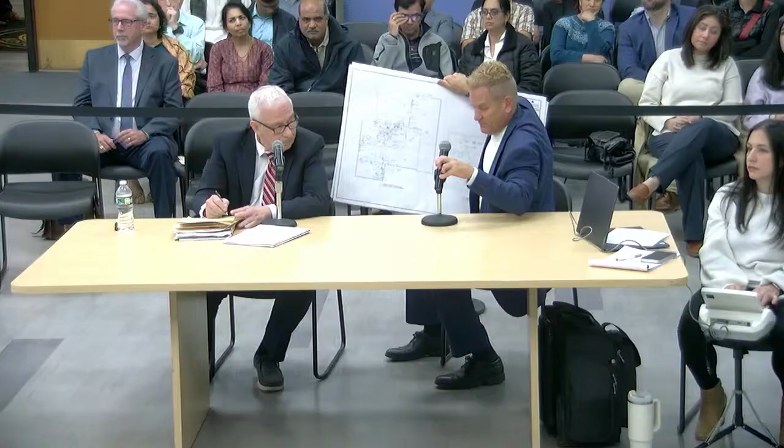So essentially, the current configuration of the house had a void in the back left corner. Mr. Kazmarski, if you'd like to take the microphone and come up, that's perfect, you don't have to stay in the chair. You can use the easel, just got to give it back though. Come right here, bring it forward so the board can actually see it.

So the existing configuration of the house is this area, on sheet D1. Currently there's a deck which occupies most of this space. My design for the owners is a residential addition for additional space in the house, which I'll go over, on sheet A1. We filled in essentially the void in the back left corner of the house. The design needed to be on the first floor for health reasons of the owners. We maintained the existing front yard setback, existing rear yard setback, existing side yard setbacks, did not go over the height allowances, and filled in this area. It did trigger a building coverage variance. Floor area ratio is okay.

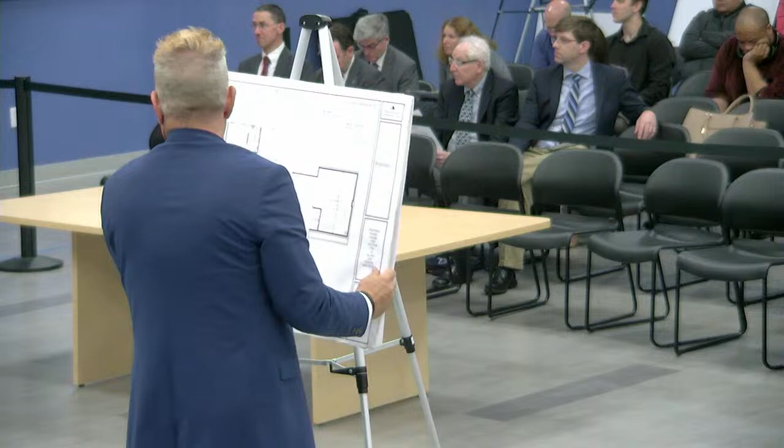Chair, just as the board's considering this, I haven't been involved in the conversation, but there's two things the board may want to consider: Edison's definition of floor area ratio, which is specific to Edison, and its ordinance is pretty tight. It generally excludes unfinished basements and attics from the floor area ratio calculation. But the exclusion doesn't really mention habitable spaces or make that classification. Habitable spaces, as defined by the Uniform Construction Code, are areas intended for daily living activities: bedrooms, living rooms, kitchens, and dining rooms. Other things like bathrooms, toilets, closets, halls, storage are not included as habitable under the UCC.

So, Mr. Architect, you're going to describe to the board the difference between UCC and what the ordinance intentions were versus the language of the ordinance. Mr. Scheer is going to determine on the fly whether he needs relief from the floor area ratio ordinance, because right now I'm hearing that you don't need relief from that. Yeah, we do not need relief from that. Okay, so just make the distinction.

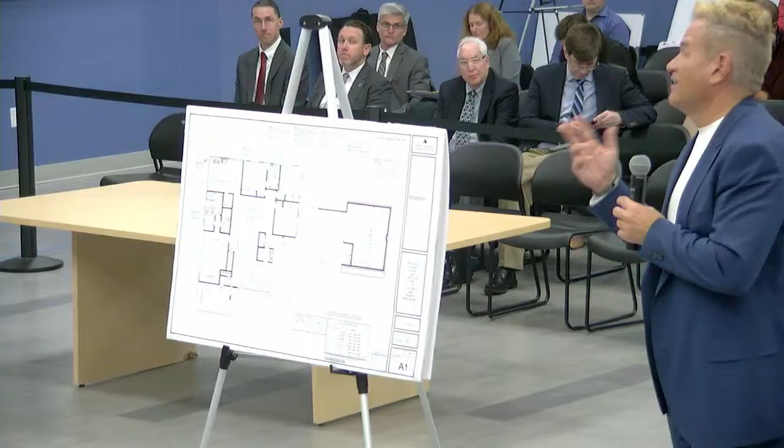And you did prepare the floor area ratio calculation certification sheet and submitted it to the good-looking people down at the end of the dais, right? Yes. Okay, and everyone found everything to be in order. Yeah, and we're significantly under the allowable floor area ratio, and that's because there's no second floor. So are you counting, whatever the application is now, the basement square feet in the floor area ratio or not?

I would have to look at the worksheet. Do we? Can you? No. Yeah, I think we're... It's not included. Habitable attics and basements are not included in that. Correct, up to two-thirds of that. No, just don't go there. Just habitable attics, yeah.

Sure. So we have 2,800 square feet. See, we are. Right, so where 44% is allowable, we're at 27%.

No, I get it, but does that 27% include the basement square feet now or not? That includes... so I guess in Edison garages count? Garages count, habitable attics count, but not uninhabitable attics and not basements. And what about basements with finished rooms? Right, so I didn't include that in the calculation. You're making it a habitable basement. Even if it's a finished basement, it wouldn't count. Correct.

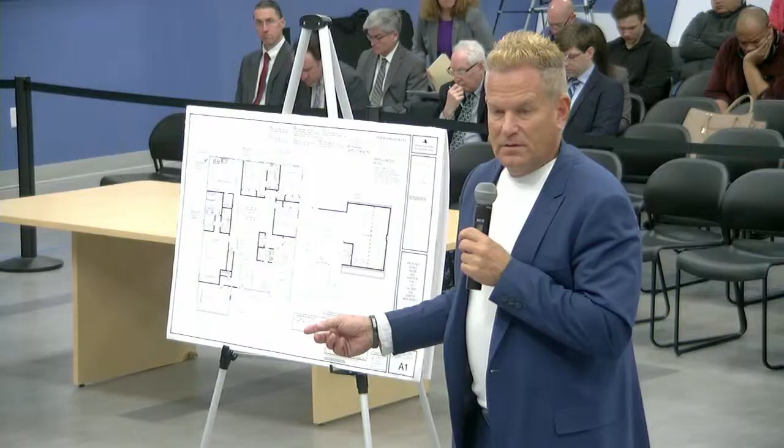So currently they have an area that's finished, right here. If they add the basement bedroom and that kind of stuff, does it become habitable? Yes, it does become habitable, but - Mr. Dave, if you could just be in the microphone please, for the court reporter. Give me the FAR sheet. So currently this area here is a finished area in the basement, which was not included in my floor area ratio calculation. There is a current bathroom there, which is existing.

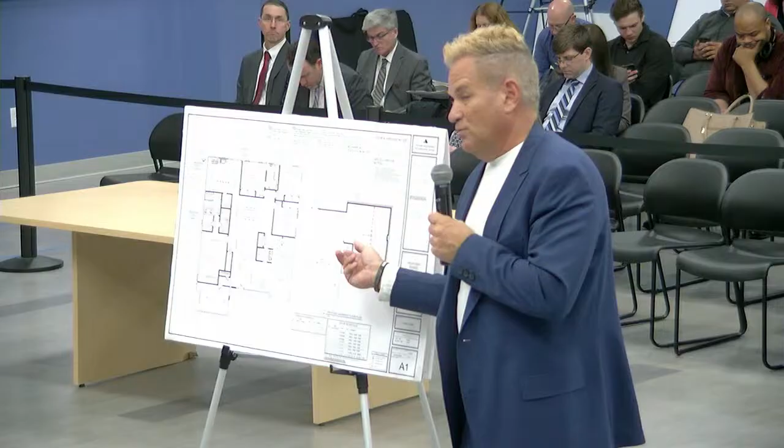The bathroom's been modified to improve the area of the bathroom. It's actually slightly bigger than the square footage of the bathroom that exists. This is the area here that has been added as additional basement space. This also would not be included in the floor area ratio, and there would be no bedrooms in the lower level, so it would not trigger.

Basements are not included, Ron. Yeah, it's just not, so - finished or unfinished? That 27% is accurate on the plan. Habitable attics are included, uninhabitable are not. Thanks, Jim.

Right, so how much work is done now for the basement? Did you do the foundation or just the excavation? Excavation only. The full basement is excavated now, but no foundation? I don't know if it's totally excavated. He got stopped before it was completed.

It's not completed. And I did ask, and I spoke to John Soltis - the contractor did take my plans, submit them, obviously anticipating a permit, and started the work. So I guess it's worse to start the work with no permit and no submission, but he submitted it and started the work before the release.

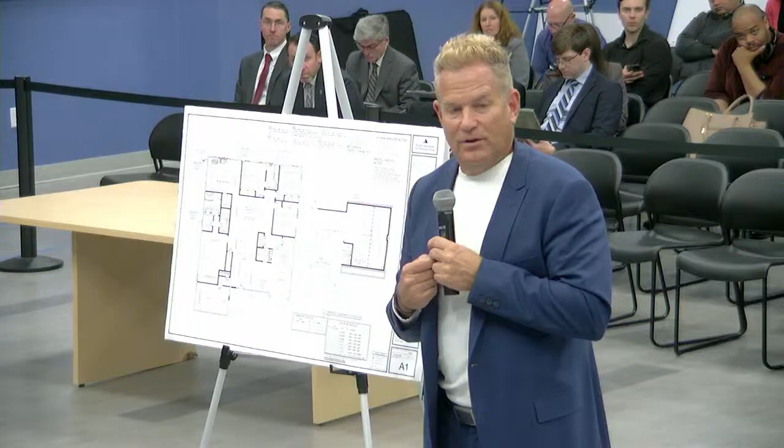But there's a letter of denial on those plans - is that correct? Is that the same plans we're talking about? So he got denied, but then he still submitted it? Well, no, he submitted, started work, then got denied. I think the timeline got messed up. They received a clear denial to start or do the work, and he started after that. Oh, okay, correct, yeah. I didn't know that.

We've had no contact with the contractor, no contact with the homeowner, none. No one came to our office to explain, and I put my phone number down - contact us please, so we can rectify the situation. Never received anything. But I take Mr. Shire's word that they pleaded not guilty in court, but I received nothing. So that's what it is. We have two things happening in tandem - the solution for that, and then the request. I got you.

Okay, so since Mr. Kosmarski has a microphone, does anybody have any questions for Mr. Kosmarski from the board? Seeing none, okay, so then you could hand the microphone back to Mr. DuPont, and we'll check with him.

Mr. DuPont, do you have anything to add? No, planning testimony is complete. Okay, does anybody from the board have any additional questions for Mr. DuPont? Seeing none, thank you, Mr. DuPont. Ms. Shire, do you have anything to add? Not unless there are some questions from the public.

Okay, so we'll now go out to the public. Anyone within 200 feet of the subject site want to be heard? If you're within 200 feet of the subject site, you received a notice via certified mail, sir. If you could please approach.

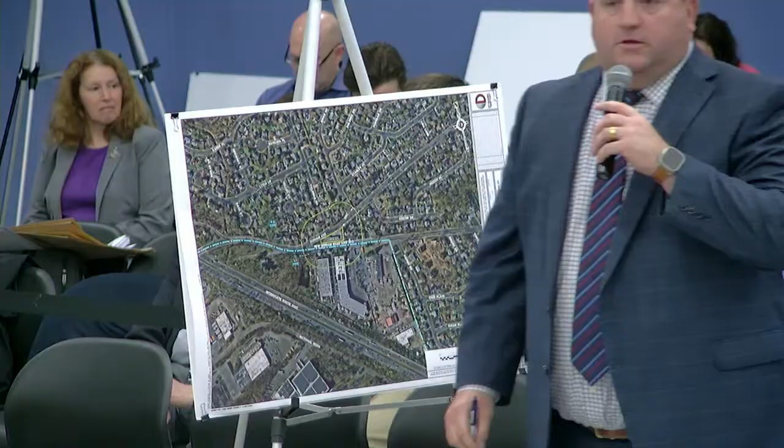Just the aerial. So we'll start off with marking the aerial map exhibit, dated April 28, 2026. Has that been previously submitted? No. Okay, so mark it A1. A1, thank you, and this is prepared by Dynamic Engineering. What's the date on that? April 28th, 2026. Okay, so today. Yes. And you prepared that document? Yes.

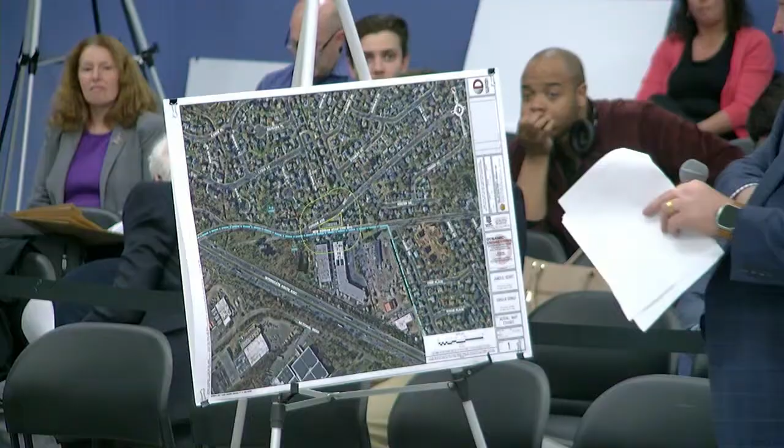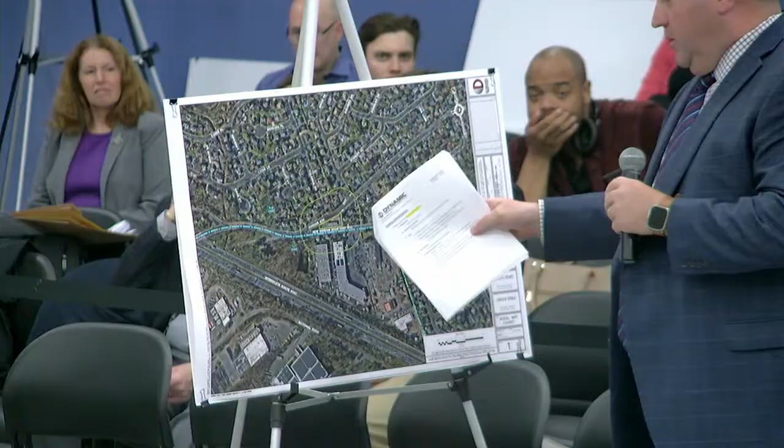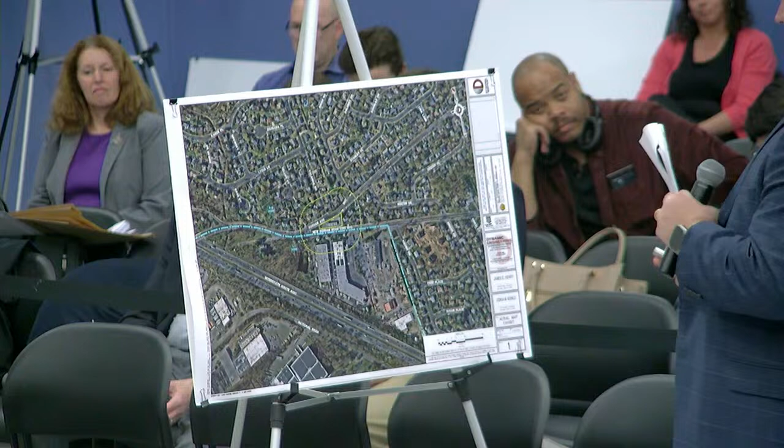This document indicates an aerial image of the proposed property with the PIQ indicated in yellow in the center, and then a 200 foot dashed line around the property indicating the property is within 200 feet. There's also a blue line which indicates the separation between the LI zone and the RB zone, with the LI zone being south of New Durham Road and north of New Durham Road being the RB zone.

The property is known as Block 5702, Lot 12, located at 764 New Durham Road, which is County Route 501 and traverses east-west. Durham Avenue comes in at almost a 45-degree angle, headed northeast to southwest.

The lot itself is kind of a pie shape. It's a very uniquely shaped lot. It's conforming as far as size, but very unique, being that it's got 2 frontages, 2 side yards, and frontage on both Durham and New Durham Road. Its principal frontage is New Durham Road.

From existing zoning, it's in the RB zone, as mentioned earlier, which is a residential district. Adjacent to the property, to the north and east are residential uses. To the south are industrial office uses. And to the west, at the intersection of New Durham and Durham Road, are residential uses.

As far as existing conditions, we reviewed historical aerial documentation. The gas station was constructed between 1957 and 1963 based on historical aerials, actually before a lot of the residential uses were constructed. The property size is 0.67 acres. It's an existing gas station use with a small building along the easterly property line.

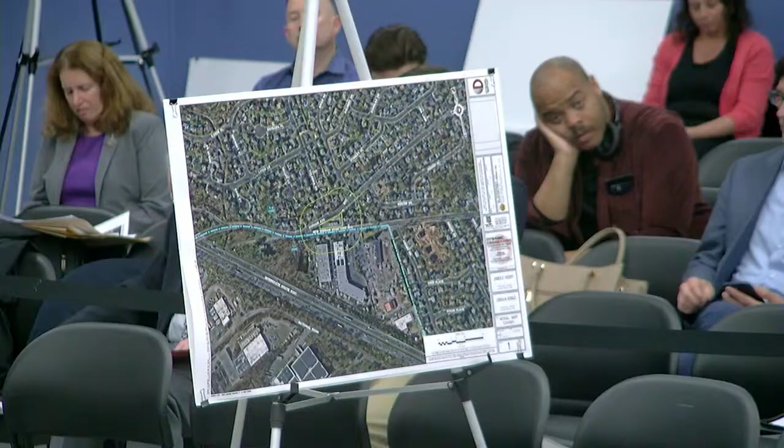There is an existing underground tank along the northerly property line along Durham Avenue. That's an existing condition. There's no restrictions on delivery time, as the site was originally approved prior to municipal land use law.

So going into proposed conditions, I'll mark A2. And Jim, just also, there's no stormwater management, and there's no comprehensive landscaping on the property.

It's been around since the 1960s, pretty much, without substantial modifications, though there have been some upgrade changes. There's definitely been a canopy added since the 60s—back then there was no canopy, just a pump. So there have been changes throughout, but as far as we're aware, there were no approvals from municipal land use.

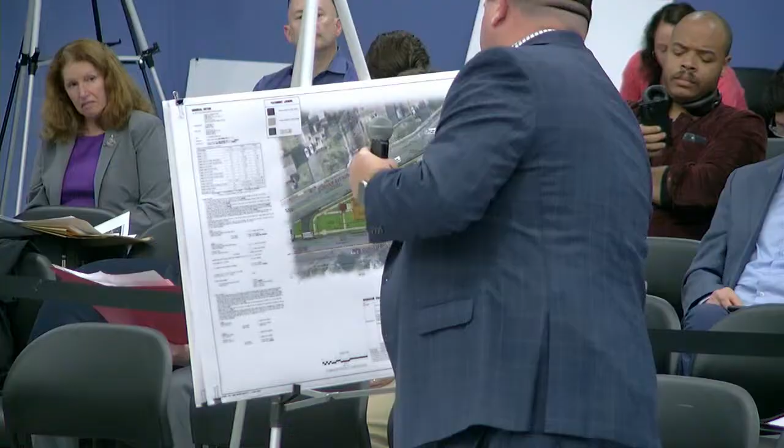So we're up to A2, which is a rendering of the site plan that was submitted with a few minor changes based on professionals' comments. That will be the on-site improvement exhibit rendering, dated April 28, 2026, prepared by Dynamic Engineering, myself.

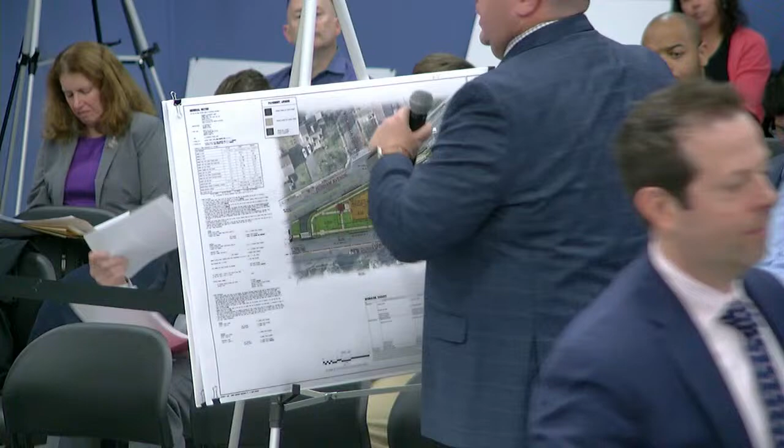This is just a color rendering with the landscaping overlaid over the property and the site plan. Under existing conditions, the canopy was situated east to west. The big thing, based on feedback we received historically, was that there was a previous application submitted that was not approved by this board, so we wanted to pull everything away from the residential uses.

When we met with the town's professionals, they indicated there was an issue at Durham Road and New Durham Road, and we'll get into the intersection improvements. But we wanted to situate this so all the activity was pulled towards the tip of the triangle, away from the adjacent residential use to the east.

So what we're looking to do is propose a 2,820 square foot convenience store. The hours of operation would be 5 a.m. to 10 p.m., so it wouldn't be 24 hours. There would be one gasoline fueling canopy, square in nature, in the center of the site.

With a fueling kiosk, there will be 2 state-of-the-art double wall fiberglass underground tanks installed. The tanks that are out there today have been there since the 1980s, based on the operations person I spoke to, so this would be a major upgrade from a safety standpoint as far as upgrading the existing tanks.

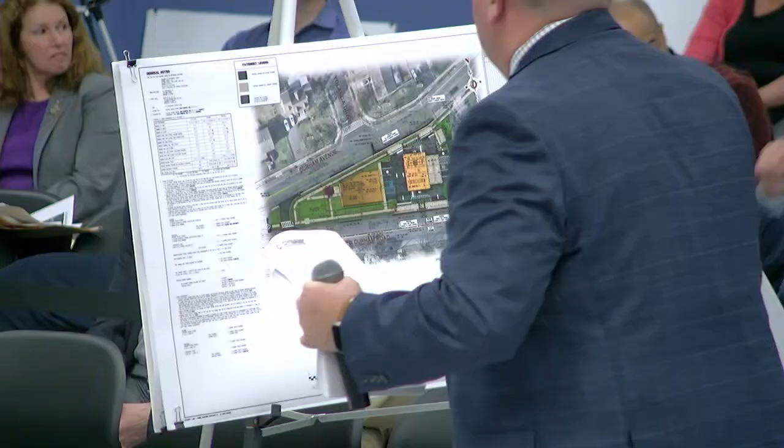As far as public improvements, I'm just going to bring up an exhibit which shows the existing conditions. We'll mark this A3. That's the existing conditions, prepared by our office. Yes, it's the existing intersection conditions exhibit dated April 27th, 2026, prepared by Dynamic Engineering. This will be A3.

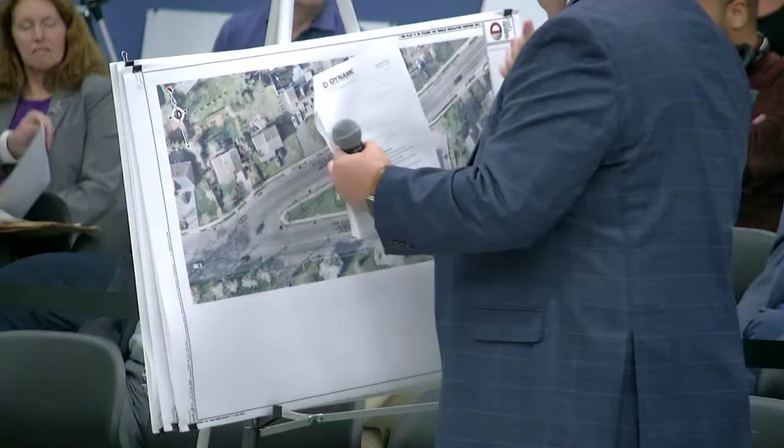So this exhibit just shows you how a car aligns and what the concern of the board professionals was. As you come down New Durham Road, as a car gets to the intersection, it's kind of angled at a 45-degree angle. One of the board professionals came to us and asked what kind of improvements could be done to align the car better with New Durham Road and provide a safer intersection.

So what we did, and I'll touch on it briefly, but our traffic engineer will get into it in more detail, is show a number of striping improvements and landscape island improvements based on a meeting we had with the county. We've had several meetings with the county over the last 6 months going over these improvements as far as updating that intersection.

One other major upgrade from a public improvement standpoint - we met with the township's sewer department this week regarding the existing sewer, which traverses from east to west along New Durham Road. One of those pipes is back-pitched, so it's not flowing properly, and they asked us to upgrade the existing sewer main along New Durham Road. Our client agreed to do that and modify it so it's no longer back-pitched.

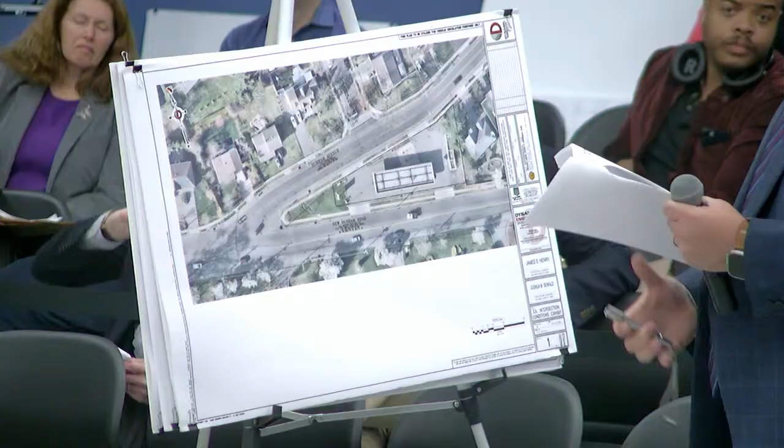So those are the two main improvements we're doing, and I'll show you an exhibit showing the intersection improvements briefly, but I'll leave the main description of the intersection to our traffic engineer. I want to show it as part of the site plan application so it's clear.

Are you going to talk about the change to the driveway conditions? Because you mentioned ingress and egress on Durham Avenue versus the ingress on Durham Road - are you going to talk about that as a traffic engineer topic? I'll let the traffic engineer handle that. All right, thank you.

Jim, just mark that for the record - what number are we at? Four. Sure, this will be the off-site county improvement exhibit, dated, marked A4, and prepared by Dynamic Engineering.

Jim, before you get to that, since you touched on it - will the upgrades to the sewer not only benefit the site, but the surrounding area as well? Yes. Okay, thank you. So this is the off-site county improvement exhibit, labeled A4, dated April 27th, 2026.

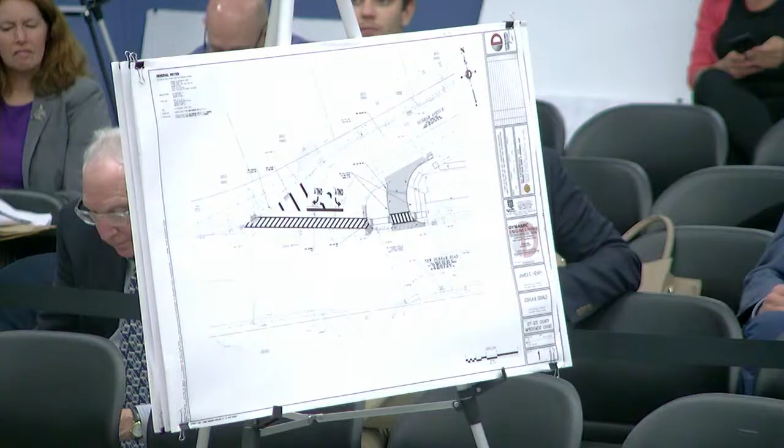This goes into the modifications we're proposing, including adding a landscape island, a dedicated right-hand turn lane off New Durham Road, and re-angling the way cars hit the intersection so they hit it more at a 90-degree angle. We're also providing a crosswalk, and the island will act as a safe harbor for pedestrians. There's another crosswalk as well as sidewalk improvements along New Durham Road and Durham Avenue. The traffic engineer will go into more detail and explain safety, but I wanted Jim to explain the site improvements themselves.

So I'm going back to A2, which is the site improvement exhibit - the colored version of the site plan. Correct.

From an operations perspective, I confirmed verbally with our client's operations person, who also worked at Shell prior to our client purchasing the property, that this gas station operated 24 hours and stopped doing so around COVID. So we're limiting the proposed hours to 5 a.m. to 10 p.m. as previously mentioned.

As far as number of employees, under existing conditions there's 1 employee at the gas station, and we're anticipating this neighborhood convenience store to have approximately 2 employees inside the building.

From a safety perspective, there was a comment regarding video cameras, which I believe the board's professionals raised, and I confirmed with our client that they're willing to provide access to the police, or add cameras if requested by the Township Police Department from a safety perspective.

As far as trash pickup, we're adding a 10 by 20 trash enclosure approximately where the existing trash enclosure exists today. It's decorative in nature and will be masonry to house the dumpsters under the proposed conditions.

As far as pickup, we will restrict the pickup time with the understanding that we're adjacent to residential to the north and want to make sure we're good neighbors. So we're limiting the hours, and we're going to modify the pickup time for the trash enclosure, as well as the drop-off time for the gas, to make sure that happens during daytime hours so it doesn't happen overnight under the proposed conditions.

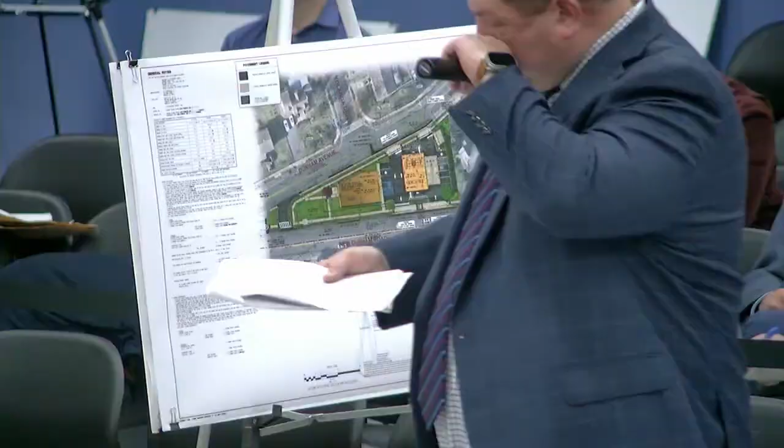Just bring your microphone closer. I've seen it with Wawa's, QuickCheks, other exotic things you hardly ever see in central New Jersey. The generator will probably be towed on a little trailer into a parking spot, and it'll be plugged into an outlet that's purpose-made for it, likely a 15-amp outlet. So it'll be occupying a parking spot for that little period of time during an emergency. Mr. Henry will testify that it's not the station owner's intent to run off of an emergency generator 24/7, 300-some odd days a year. Is that about right? I'm agreeable to that, yes. Okay, thank you, Mr. Carley. Thank you.

All right, Jim, you want to go to lighting? Sure. Just going into lighting, the existing lights that are underneath the canopy pop out of the canopy, they're not fully flush underneath. It's the older way the lights were situated back a number of years ago. We're looking to have fully flush LED lights underneath the canopy. We're proposing 12 recessed canopy lights underneath with a mounting height of 16.5.

As we get closer, there's one light that's adjacent to the residential to the east. That light is very short, so there's no spillover onto the residential. We provided a lighting illumination study to the board's professionals - it's 0 foot-candle at the property line. And then there are building lights around the outside, which are also downward-facing full cutoff lights.

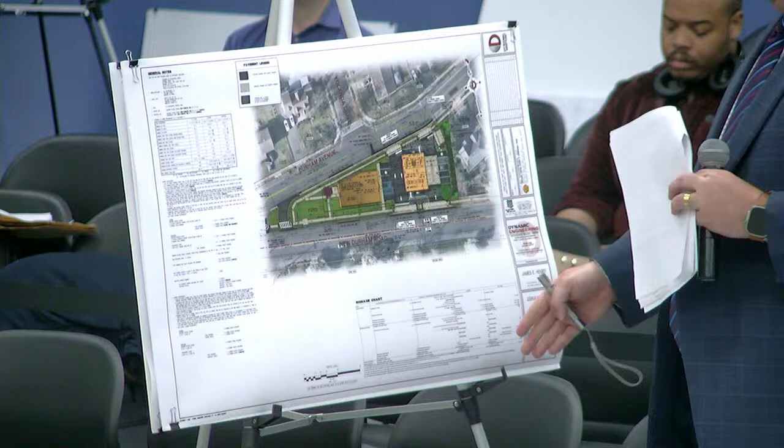I would imagine so. One thing - we're going to get into landscaping in a minute - but we're proposing a thick landscape buffer, which when installed will be a mature kind of landscaping with evergreen trees. We're also proposing a 10-foot vinyl fence to help buffer the adjacent use from the residential. So it's going to be a very thick buffer to the east.

Transitioning into landscaping, we're proposing one shade tree, an ornamental tree, and 20 evergreen trees, installed at mature heights of 8 feet. There was a comment about installing green giants, but the board professionals had concerns over deer, so they recommended switching to eastern red cedar, and we're agreeable to that. There are also existing evergreen trees along the easterly property line that we'll supplement. We're also adding 42 shrubs, 25 deciduous shrubs, and 17 ornamental grasses.

The main idea is to provide nice landscaping, emphasizing buffering the use to the east, and providing buffering around the perimeter so no headlights face residential uses to the north, plus nice landscaping along the edge of the building. This also results in a reduction in impervious surface across the whole site orientation. In total, we're proposing 106 total plantings as a major upgrade to the overall site.

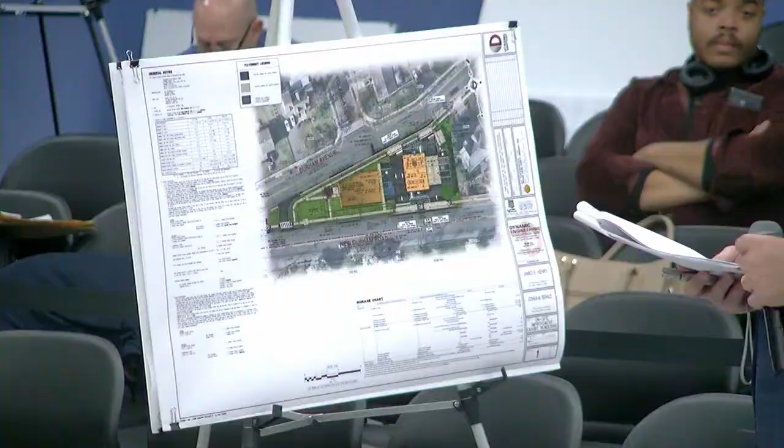Jim, before you get into the building, can you just speak to how the reduction in impervious coverage and how stormwater would be improved by the site plan you designed?

Sure. As mentioned, we're adding a number of landscape areas and reducing the amount of impervious area, which improves stormwater management since we're reducing the flow off-site. We're also reducing motor vehicle surface area, so from a TSS removal standpoint, a pollutant load removal measure, we'd have less pavement area and more rooftop space. From a stormwater management perspective, we're not considered a major development, so NJAC 7:8 doesn't trigger in this case because of the site size. But we are reducing the impervious coverage even though we're not required to.

It even further helps reduction of impervious coverage and is beneficial to the neighborhood as well. So from a stormwater perspective, you see an improvement to the surrounding area. Yes. From a lighting perspective, you see no significant negative impacts to the surrounding properties.

Correct. From a landscaping perspective, you see an enhancement to the property and the surrounding area. Yes. And from a utility perspective, you also see a benefit not only to the property, but the surrounding area. Yes.

All right, can you just, before you get into the building, speak about ADA compliance as it might relate to the parking spaces, as well as any sidewalks or improvements on the site? Sure. So for ADA improvements, we have a note on the plans about upgrading the existing sidewalks.

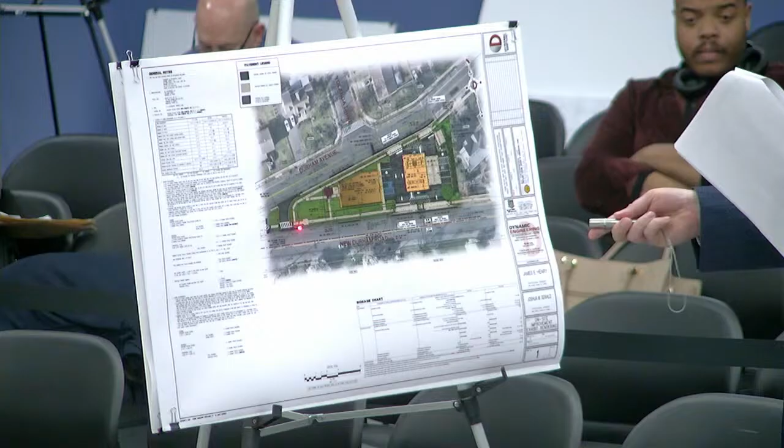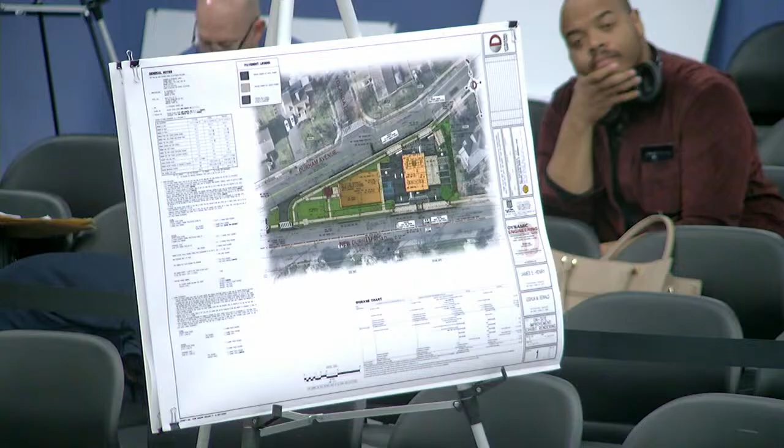Any area that we thought needed to be upgraded, we modified the sidewalks, and we're agreeable to upgrading the sidewalks if they're in bad condition along basically every frontage that surrounds the site. We're also providing the crosswalks across Durham Avenue, so it's a major upgrade. We're adding ADA ramps at every single intersection, including across our driveways along New Durham Road as well as Durham Avenue.

All right, why don't we now go into the building? Great, thank you.

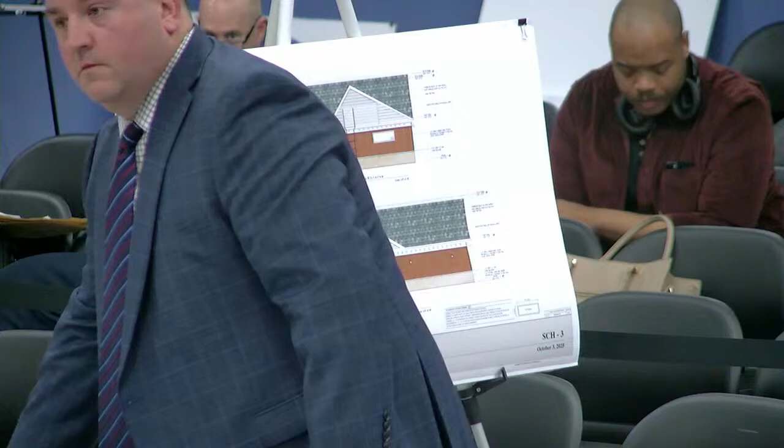While we just changed the boards, Jason, can you confirm that along the easterly property line a solid fence will be installed? Yeah, Jim had indicated there would be a vinyl solid fence along the easterly property line in addition to the landscape buffering that's proposed. We were showing it at 10 feet to make sure it's a significant buffer to the adjacent residential.

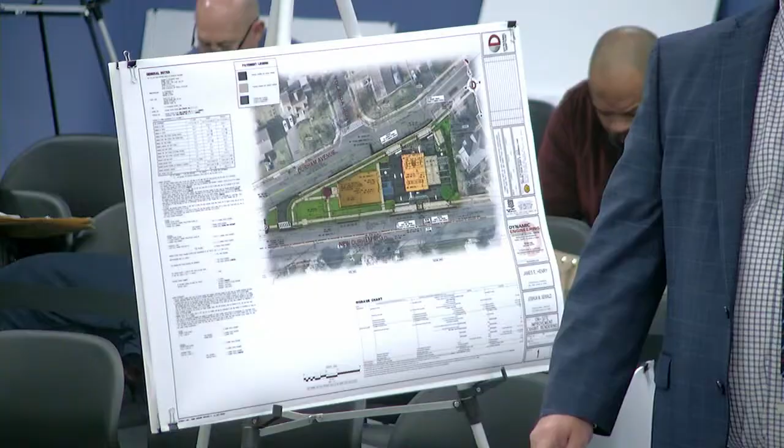Got it. Thank you. 10 feet in height, Jim? Yes. Which is, your typical fence, just so everyone's aware, is approximately 6 feet. So if the board is open to it, we'd be willing to install a 10-foot high fence or an 8-foot, whatever the board feels is appropriate. Our client's willing to do whatever it takes to make sure there's a proper buffer there.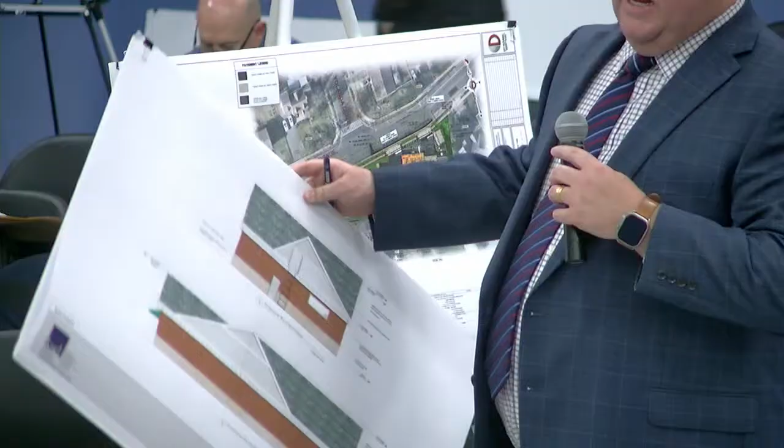Thank you. Sure. So what we're going to be showing now are elevations of the proposed building, as well as a floor plan showing the interior layout. Our architect is here, but I'll be presenting it in case you have any specific architectural comments the architect can answer.

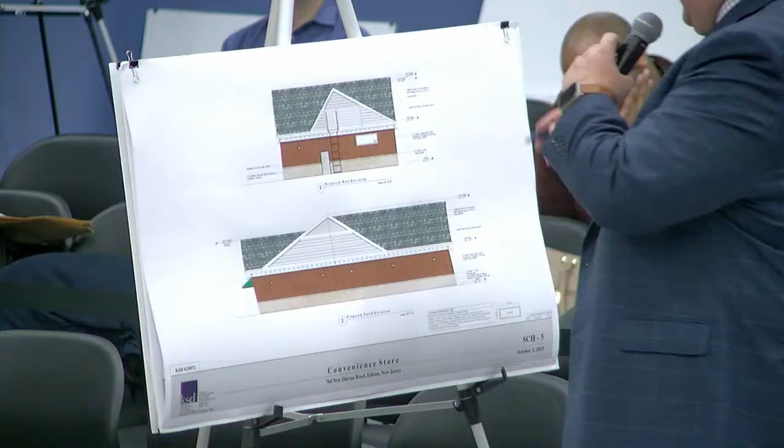So A5, this is the convenience store. A5 is a color rendering of the elevations that were submitted to the board, prepared by KSD Architecture, dated October 3rd, 2025. There are 2 pages, one is the elevations and the other is the floor plan.

Actually, 3 pages, I apologize. So we have multiple elevations. Shift over, go to sheet 2 so you can see the front of the building.

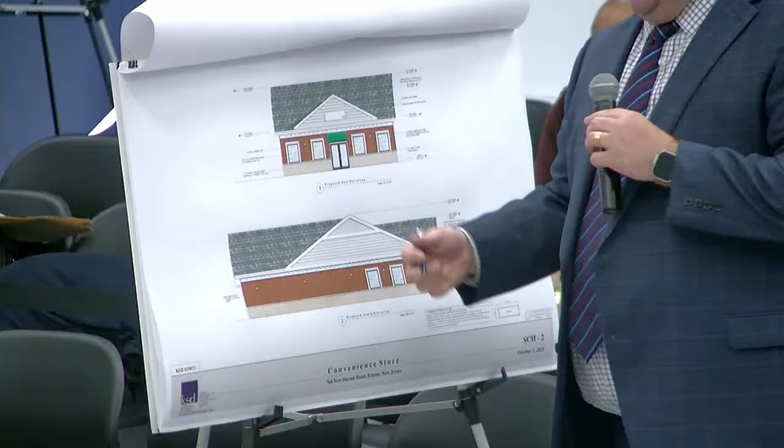As was mentioned earlier, the building that's out there is in disrepair. One of the big things we worked with our architects on is really making this fit in well with the community, make it look residential in nature, have a pitched roof, and give it that residential feel and a high quality feel, being that it's a residential convenience store. From a building size perspective, it's relatively small. Wawa, for instance, is roughly about 5,000 square feet. This is a smaller one, under 3,000 square feet at 2,820 square feet.

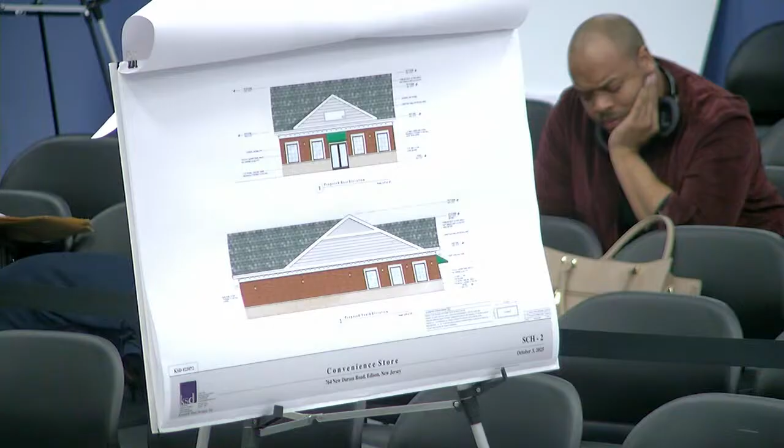There's a main door location in the front, as well as a door to the rear. Just to be clear, the main door goes to the parking lot side, not towards the north of the property, correct? That's correct. So it faces east.

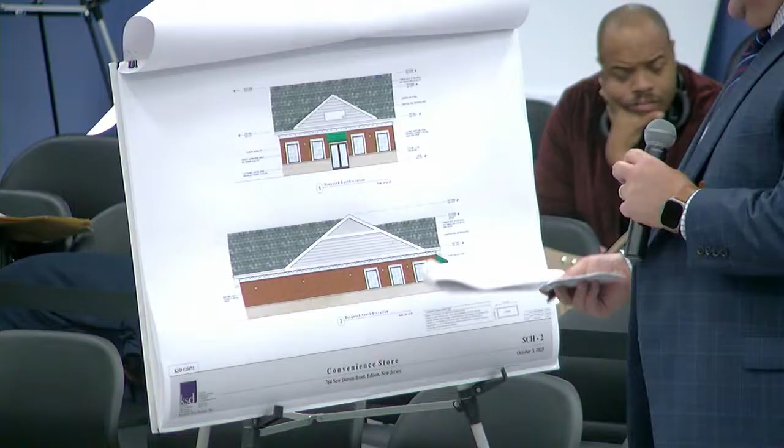From a building design perspective, we're adding a brick veneer system, probably a Nichiha panel, to give it a brick exterior look, with a natural limestone veneer on the bottom, which is a high quality stone material. Aluminum frame windows really emphasize the architectural, residential neighborhood it's transitioning from New Durham to Durham. The building height is 24 feet to the roof eave, with basically a pitched roof, making it look very residential.

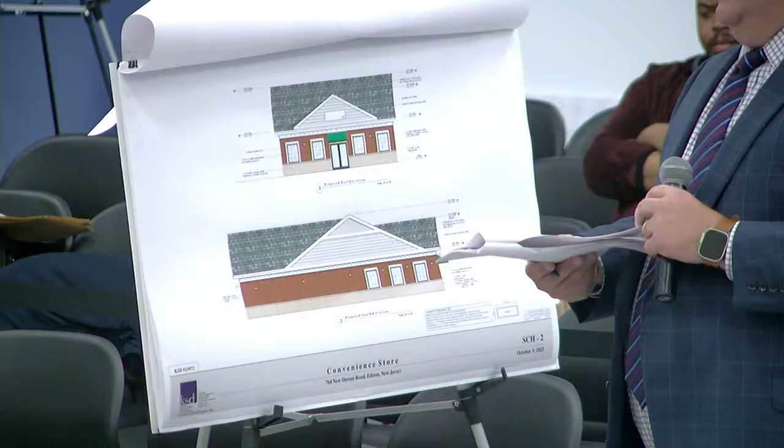The HVAC is going to be enclosed in the roof. A lot of times when you see commercial uses, there's HVAC adjacent to the building and it doesn't look very nice. This would be screened within the roof so that it wouldn't be visible from the naked eye if you were standing adjacent to it. It's an A-frame roof with asphalt shingles and dentil molding wrapping it to give it a colonial look.

Overall, between the two sheets you can see at the rear this is where the HVAC would be, facing to the west. Again, this would not be visible, as the HVAC would be fully screened with a louver system facing west. We don't really have a back building, you can see the building from all four sides, so our client was agreeable to making sure all four sides of the building look nice and have a nice finish. The pitched roof in the front would have a small canopy overhanging the sidewalk, and the rear would just have a ladder system which would go up to the HVAC area.

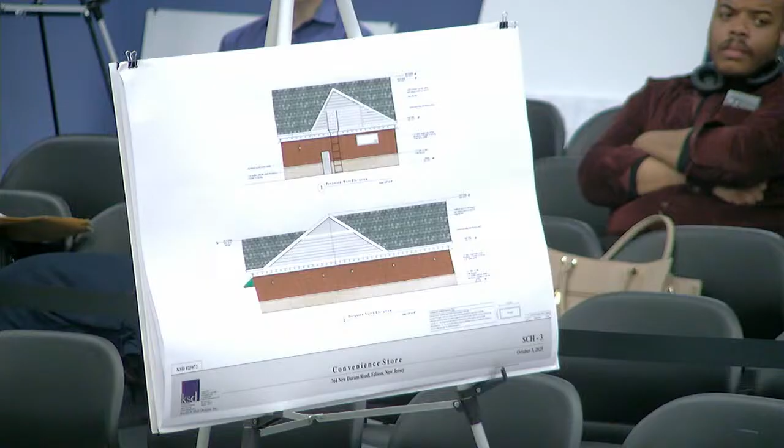So going into the third sheet, which is the floor layout. That's SCH-1, October 3rd, 2025, prepared by KSD.

As you come in, the parking area is to the right-hand side. This is situated so that north is facing up on the third sheet. So as you enter, you come in off the easterly side, and there are racks for convenience store items directly in front of you. There's a sales POS item, hot dog roller, as well as POS area. There's a coffee area along the northerly side of the building, and then a refrigerator area and back area behind it, which would allow for access out the back door. The refrigerator area, as you came in, would be against the far wall, providing refreshments and drinks, and then just a standard coffee island as well as racking for standard convenience store items.

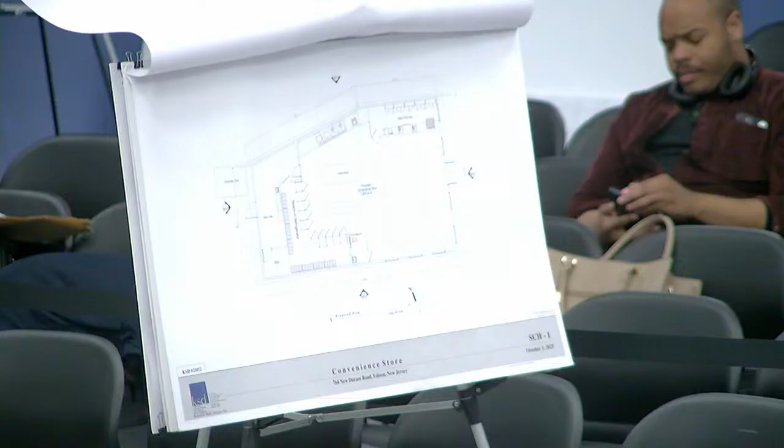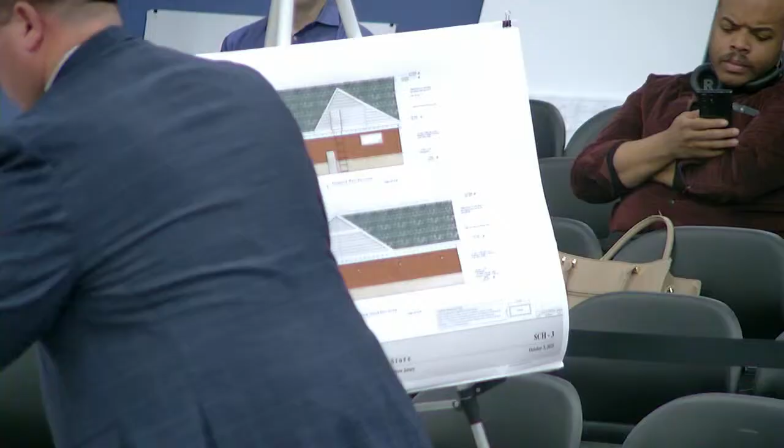And Jim, you've had the chance to review the board engineer's letter in connection with this matter? Yes. And that letter is dated March 26th? Yes, March 26th. The applicant will comply with all those comments set forth in that letter? Yes, so I went through them, and any that were gray in nature I tried to weave into my direct testimony. If there's any I didn't address, I'm welcome to answer questions now.

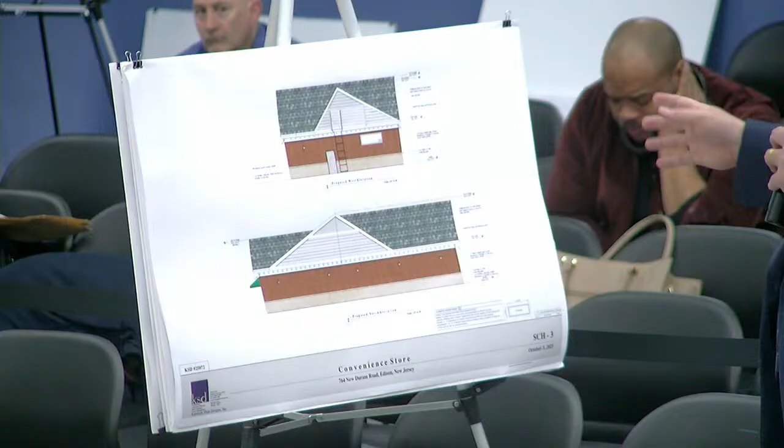Yes, I think on the site plan there's vacuum and air, which we're providing mainly because most people expect that at a gas station. So we're proposing that along the easterly property line, shifting it away from directly in front of the building. And as far as exterior ice, we're anticipating that to be inside the building. Our client operates a number of gas stations throughout New Jersey, and he doesn't like to have that clutter look in front. He likes to have it nice and clean inside the building.

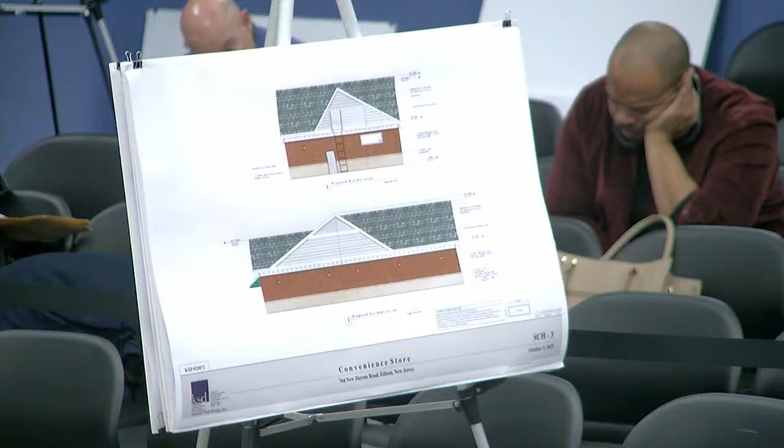Jim, Mr. Rayotz and I will remember when they sold milk at gas stations outside, remember the milk machines? Yes. Now, for the parking related to those features, we're going to rely on Mr. Verderasi because I'm assuming he's going to talk about the parking. You had provided 5 spots plus 6 banked. The bank's going to be there now. You're going to have handicapped and then some dedicated parking in those 11 spaces. So we'll rely on Mr. Verderasi's testimony to describe that to the board. Is that acceptable? Yes. Absolutely.

As Mr. Henry said, he covered most of the action items where I requested testimony. The preponderance of items in my March 26th report point to plan revisions that would not result in the site plan being altered dramatically. The sizzle and the steak relative to site layout here is with the County of Middlesex, with the rearrangement of that intersection, and I'm sure Mr. Verderesi will explain the efforts his office is going through. Absolutely, I just wanted Jim to set forth the site improvements and off-site improvements, and Nick will go through it from a more traffic-based perspective.

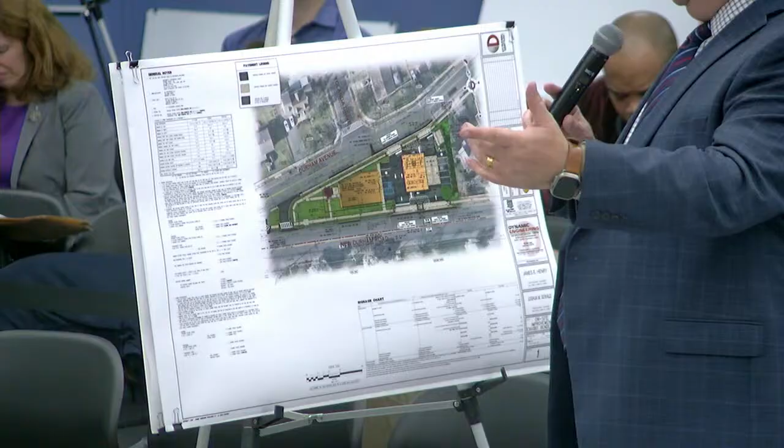Just to clarify, because we are adding the EV space, we did have 11 spaces, but we get the credit for the additional space because we're moving the EV. So we technically have 10 spaces, but it's 11 when you consider the EV space.

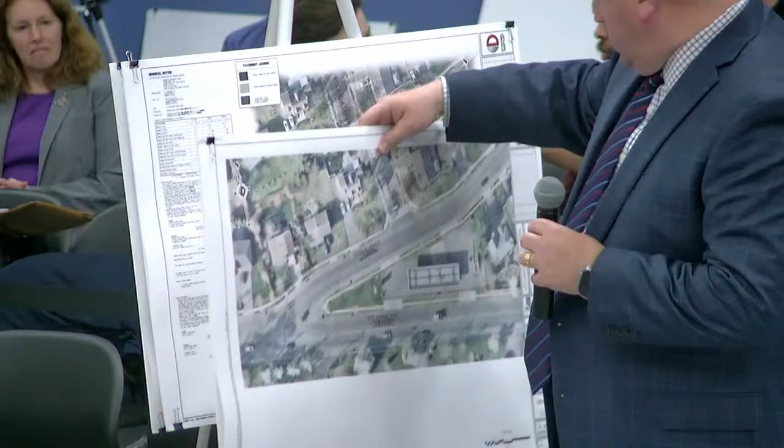I'm trying to understand, you're saying the gas station's being moved closer? Correct. Right now there's a masonry building that's closer to the residential. Essentially that's what's being expanded from 300 square feet to 2,800 square feet, but it's being flipped closer to that intersection, and that canopy is coming closer to the houses. I could scale it off. My understanding, I think...

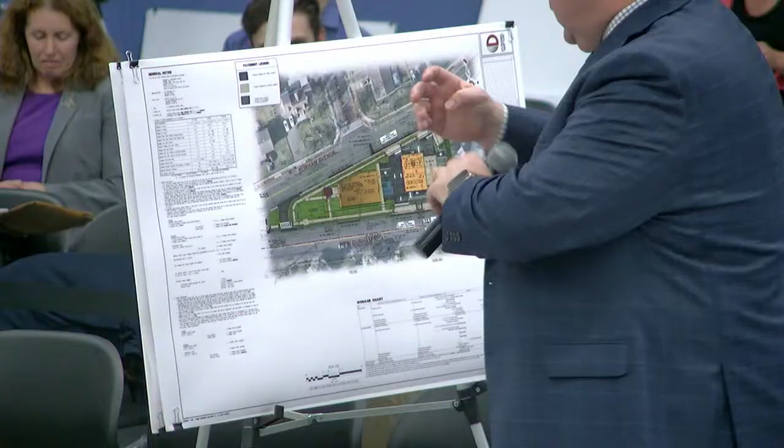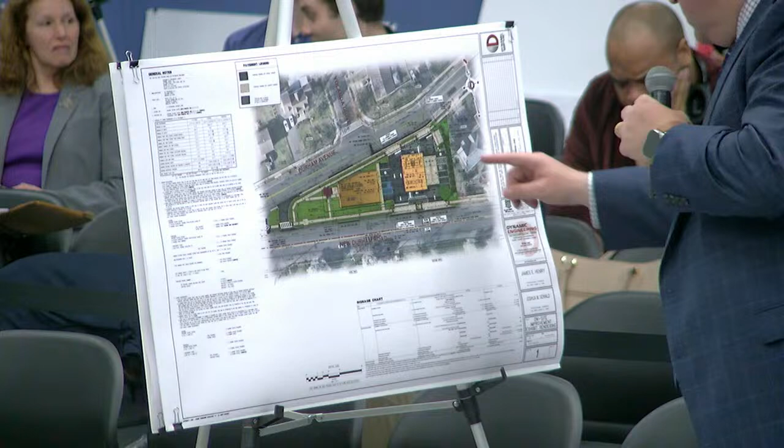The buffer is being made larger under proposed conditions, so the gas station isn't getting closer to the residential. It's not getting closer? No, it's being pulled away from the residential. Right now there's a masonry building there, but that building is going to be removed, and instead we're going to have parking there. Right now there's a 5-foot setback to the residential where the parking area is, and we're creating 10.5 feet. So we're pulling it back an additional 5 feet and creating more of a buffer to the adjacent residential. Okay, but the current existing masonry building is going away, and parking is going to be there, correct? Yes.

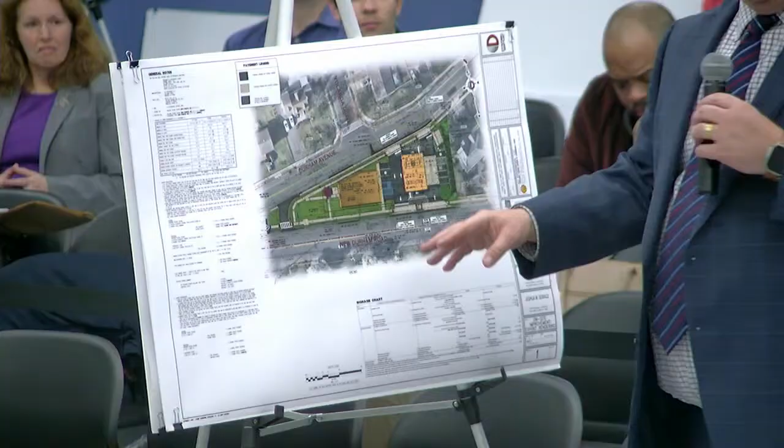So what's the beneficial use of having parking along that side? My question is, now you have headlights going into people's houses, et cetera. Well, the headlights aren't going into people's houses. We've got a thick tree buffer right adjacent to it, and we're also proposing a 10-foot high fence that's going to block any sort of lights of that nature. The parking spaces that will be used primarily are the ones in front of the building and the de facto spaces underneath the canopy. So Jim, these spaces over to the east are going to be seldom used under any circumstances, especially during off-peak hours. Yeah Jim, I think it's a good question, and we should walk through it slowly.

Sure, I'm glad it was asked, because we paid a lot of attention to this issue. So right now, the structure that's there is very small, correct? Yes. Okay, that's one. Two is the landscaping located in that area right now is decent, but not very robust, is that fair to say? There is no landscaping there, unless you're talking about the northeasterly corner where there's an existing vegetated area. But behind the building, I was out there today, there is no vegetated area between the back of the building and the adjacent fence line, which is the residential. Okay, and there's no opaque fence we're proposing, correct? No, the residential already has an opaque fence adjacent to the property line, and we're adding another one adjacent to it, even higher.

All right, so now let's talk about the proposed. Let's start from the east and go west. Sure. So first, we're going to have an opaque fence that runs the length of the property and is also 10 feet high or 8 feet high, whatever the board feels is appropriate. Correct. Okay, then we're adding...

One thing to note, we're not running along our property line because it actually bisects the residential property. We thought it would be odd to have the fence go through there, even though when you look at the site, it's odd because our property line kind of bisects their front yard. So our client is looking to cut it where the building is so the fence doesn't awkwardly go through the middle of their property.

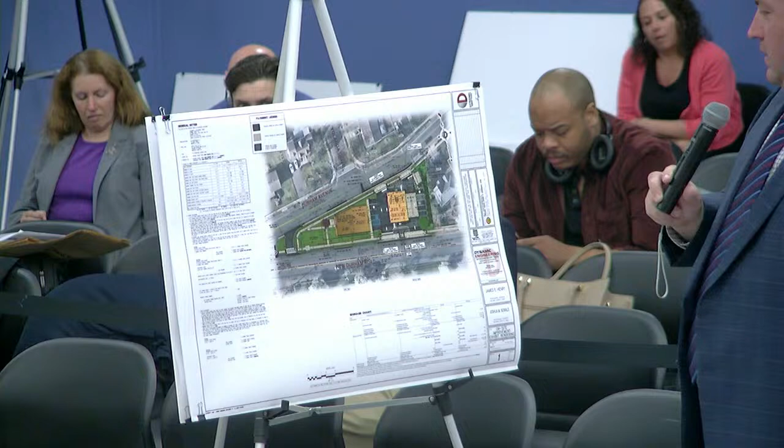So our traffic engineer will get into this. We have a very similar layout. We designed the gas stations on the Parkway in Woodbridge, very similar layout and spacing to what we have here today. This is obviously a lot less. This is a neighborhood convenience store and gas station. It doesn't nearly have the traffic that you're referencing, you'll have that many cars.

Be honest with you, if there are 2 cars there, to move around was a difficult time. Now you're adding a convenience store, 4 gas stations. I expect almost 4 to 5 cars almost all the time on that property, Jim, including the 3 employees' cars.

Yeah, I think Jim and the traffic engineer should respond to your question, but I just want to ask Jim one thing: do the drive aisle widths comply with the standards in the ordinance? Yes. So for the two-way traffic entering and exiting the site, it's 24 feet, correct? It's a little bit over 24 feet, approximately 26 feet.

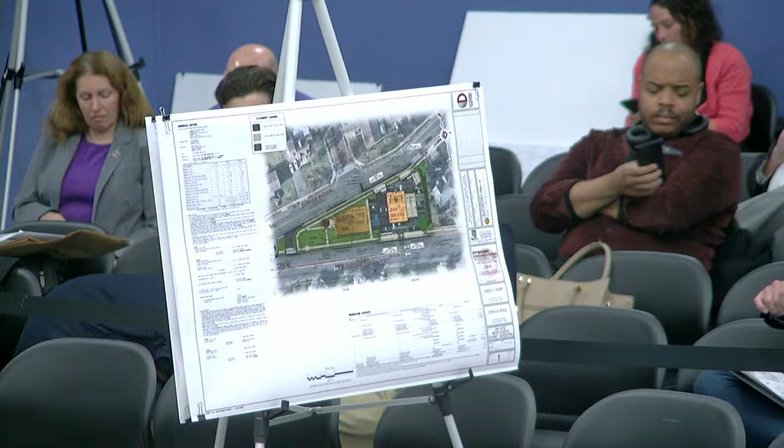So how many gas stations have you designed in your career? Over 100 gas stations. So in your professional opinion, and it's a fair question, I want to make sure we make the board comfortable with it: the drive aisle widths and the turning maneuvers, we could have the traffic engineer speak to it as well. But from a site perspective, you believe they meet all industry standards and work well on this site? Yes.

During your snow removal, where do you stack the snow? Which part of the property do you stack it? There's plenty of areas in the landscaping adjacent to it. You could stockpile it using a skid steer. There's areas to store it on the west side of the building where there's landscaping.

And the vendor delivery would be at the entrance side or on the back side? The delivery would be in the front. We'd be using a box truck. Not on the residential side, was your question, right? Yes.

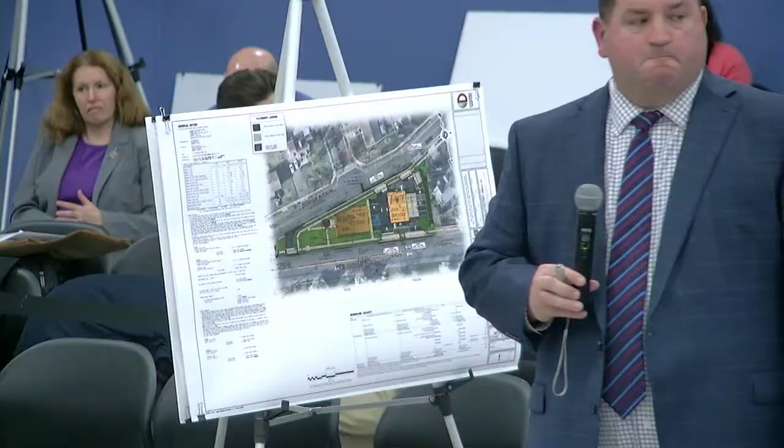Yeah, Mr. Chairman, Vice Chairman, can you show on the drawing where you would pile the snow? So there's a grass area behind.

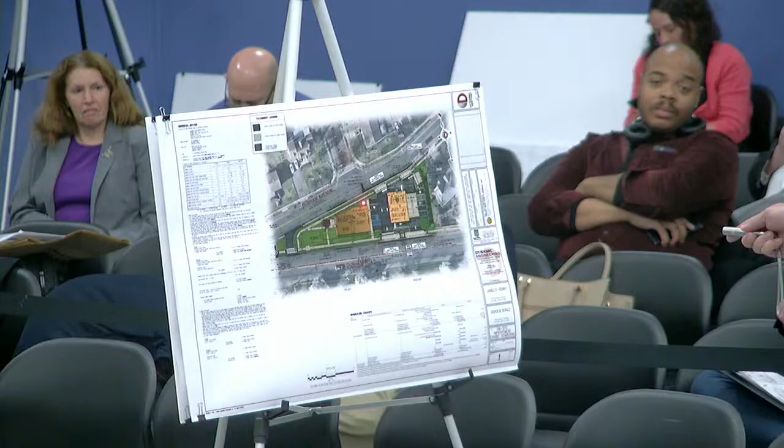So there's a grass area behind the building, a large grass area adjacent to the building, and landscape islands. In certain circumstances on other sites, we have trucked snow off as well, if you have a major storm event like we had this past winter. But during regular storm events, there's plenty of room around the perimeter of the site in the landscaping areas to store the snow. If you have something extreme, a foot or two of snow, you might have a circumstance where we'd have to truck off snow. But during major storm events over the last 10 years - this year was particularly bad for snow - in those circumstances, we have tenants that basically truck off the snow off-site because there's not areas to do it.

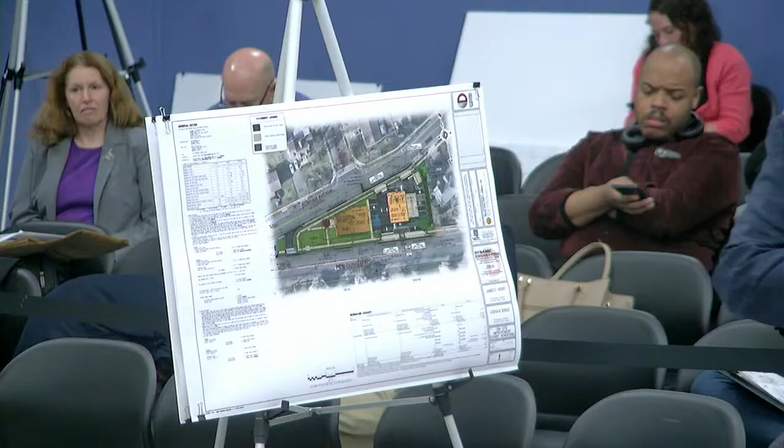So just for the record, you have received a letter dated today from Fire Chief Andy Toth, saying that your proposed site plan is suitable and meets requirements related to New Jersey Uniform Fire Code regulations, fire apparatus turning radius, and then also a letter from Township of Edison Police Department, Sergeant Winters.

The proposed plan does not directly affect traffic flow and meets ADA parking requirements. Any markings or signage should be in compliance with the manual on uniform traffic control devices. No further devices needed. You good with that? Yes, and that's dated April 10, 2026. Yes. Okay, all right.

Any other questions for Mr. Henry? Oh, Mr. Carley.

Revisit the matter of noise. We did ask for an EIS subsuming a noise study relative to the equipment, Mr. Henry, because of its location on the site and the lack of shielding. When the board was talking about moving the building, I think intuitively they were talking about the building itself being a buffer to the residences, and the building would lend some acoustic shielding to the residences on the other side of it. But then it would present other problems to those residents, because the mass of the building would be on the residents. There'd be a blind alley behind it, and you might have some activities behind the building between your fence line. So the building location is basically a compromise.

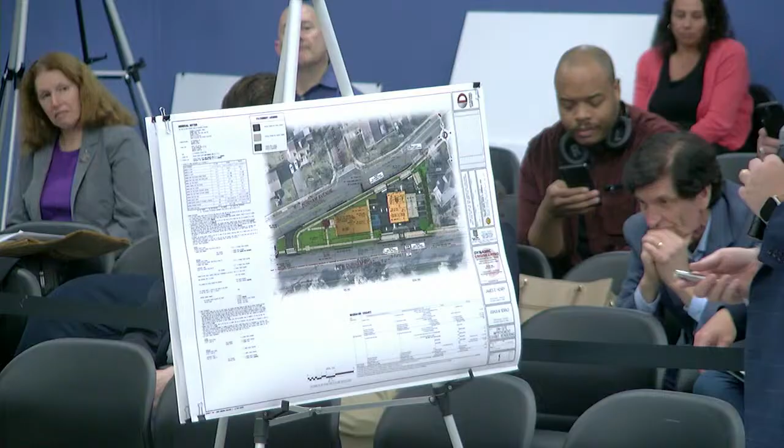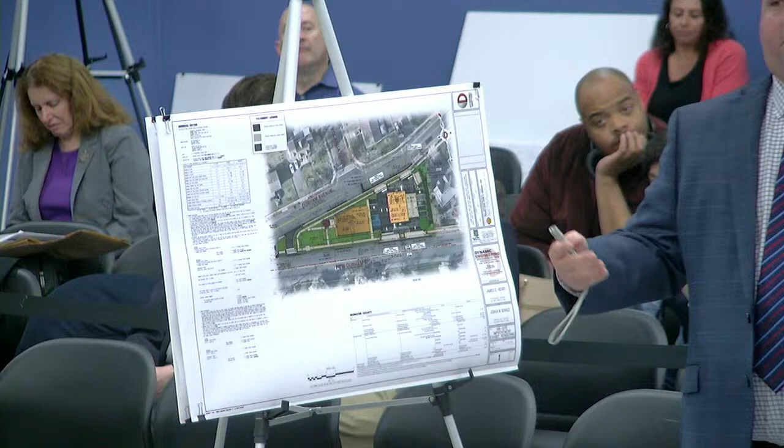I've worked on convenience stores before at different locations, different towns, like Westfield for instance, where there was an alley behind and concern over people going back there, things of that nature, where you're hidden from view and not able to see what they're doing back there. Whereas in this circumstance, you're able to see all four sides of the building. There's no hiding, there's security cameras, and all the activity is pushed to the west, away from the residential.

Jim, Nick can speak to this from the curb cuts, but as Mr. Carley indicated, if you flipped it and put the building on the other side and the gas in the front, which I understand the comment, the driveways would then move closer to the intersection. Yes, they would, and that's not something the county would prefer. No, the county wants to move them as far away.

So you can see on exhibit A2 there's a dark area where we're removing the two driveways that are closer to the intersection, and we're shifting them roughly 50 feet to the east, away from the intersection, so it's an improvement from a safety perspective. I'll let our traffic engineer get into it, but one of the big things in working with the board engineer as well as the county engineer, they had a lot of discussion about the activity and the driveway locations. We went back and forth with them 2 or 3 times regarding the orientation, the signage, and making sure there were no trucks allowed.

And then also the intersection, which our traffic engineer will go over as far as the orientation. There was a lot of concern regarding the intersection of Durham Avenue and New Durham Road, which I think we've addressed. We've worked with the county and gone back and forth with them a number of times, and also regarding our driveway locations, which I think is the safest kind of driveway design we can come up with for this layout.

But currently you have 2 access and egress on Durham Avenue and 2 on New Durham Road, correct? So we're reducing, there's 4 right now and we're taking it down to 3, so we're improving over the existing conditions. The ingress and egress count as 1 on New Durham Road. So we're taking 4 full movement driveways, moving them further from the intersection, and reducing them down to 3 driveways.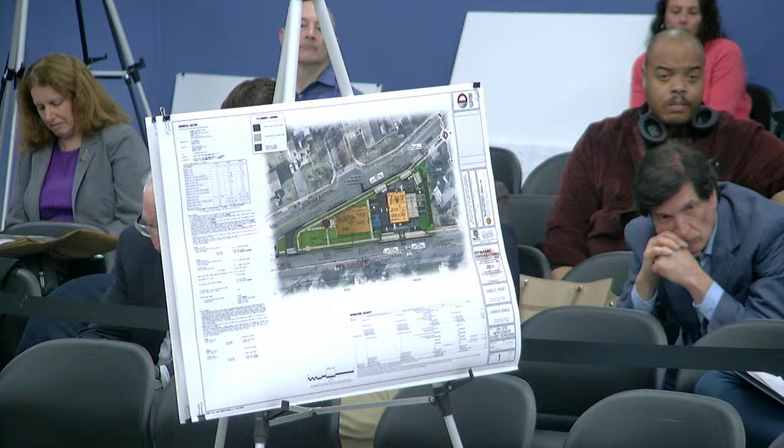I get it, but if flipping the building and gas stations, you may not need all 3, you may just need 2 probably at that point. Much wider, but they would come in between for the gas station and the convenience store, and would still be away from the corner.

I personally think we've reduced it as much as possible, and the orientation we have is the safest to allow for safe vehicle traffic around the canopy as well as the convenience store. Our traffic engineer will testify to that, but as far as site plan layout, given the different accesses and circulation around the canopy, I think having those three is as low as we can go.

My biggest concern is that we are adding another gas station, the convenience store, non-conforming. You have a 4-foot setback on both roads. That's my biggest concern, unless you want to slim the building and keep it there. 4 foot on both sides, adding another convenience store on this property is a non-conforming use, and you are adding a non-conforming building.

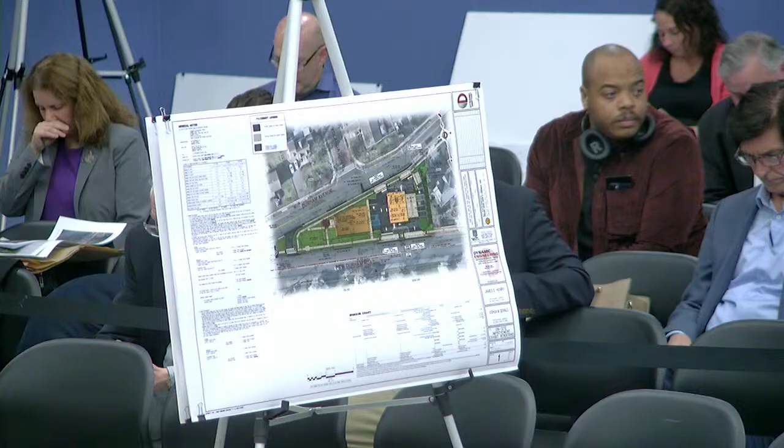So we did those traffic counts, identified existing conditions. The counts were done at the existing site, at the intersection of Yolanda and Durham Avenue, as well as New Durham and Durham Avenue intersection. We also pulled crash data.

So I went through the crash data. We got it for about a 4-year period, just at the intersections, there were others outside the influence of the intersection of New Durham and Durham. There were about 50 crashes in that 4-year period. A good amount of them, more than half, were rear-end crashes on Durham Avenue. The reason behind that is you have an intersection that operates at overcapacity on Durham Avenue, so people are waiting a rather long period of time, get a little frustrated, maybe a little more aggressive, and you have rear-end crashes there.

The other crashes at the intersection, there are a few side swipes. You have a number of right-angle crashes where someone's turning right or left out of Durham Avenue, or turning left into it. Can you just point where that is?

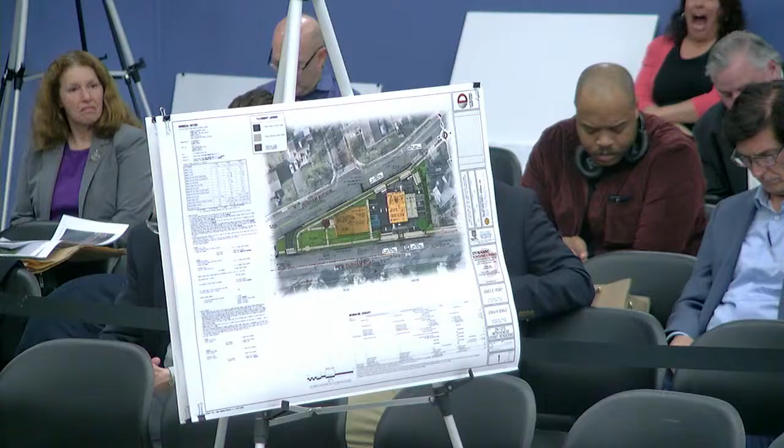Oh yeah, we'll go to that other exhibit. Has that been entered? Yeah, the bottom one, yes. If you could just bring the microphone with you. I got him. I'll use the pointer, I prefer. And you're relying on Exhibit A3, correct? Yes.

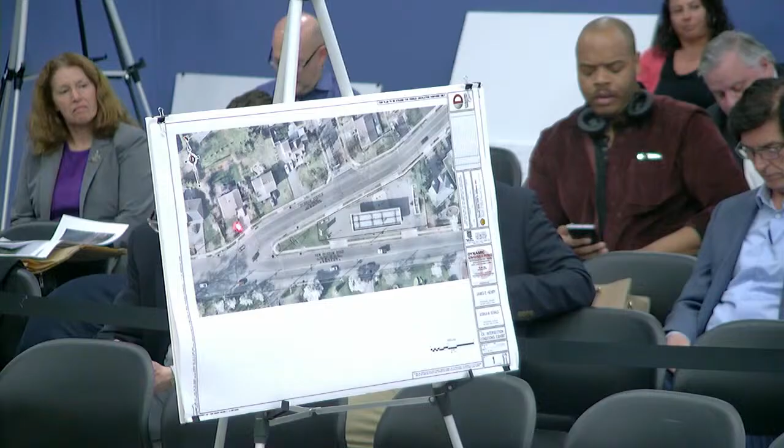So again, the crashes we mostly saw were rear-end crashes on Durham. If you're traveling south on Durham, calling New Durham Road east-west at that intersection, you had some crashes that were right angles, so either someone making a right or left out of Durham Avenue crashing with someone along New Durham, someone making a left turn in. You had a couple side swipes of people waiting to make a left, someone bypassing. There was maybe a weird crash, some where people hit a curb or whatever. So those are the outliers.

But the ones that relate to the intersection, rear-end crashes aren't as severe. You generally don't end up with casualties or major injuries on the rear ends. It's the right-angle crashes that seem to have the primary casualty rate, or the higher casualty rate or incident rate.

So what we're able to do at the intersection, I guess I'll go into the improvement plan. You want me to do that now? Talk a little bit more about the study first. Yeah, I would do the trip generation. All right, so I'll go into the trip generation.

So as I said earlier, we did traffic counts. At the site today, I have to say there were a handful during our counts of people actually cutting through the property, so I'm representing it all as if they came onto the property to use the gas.

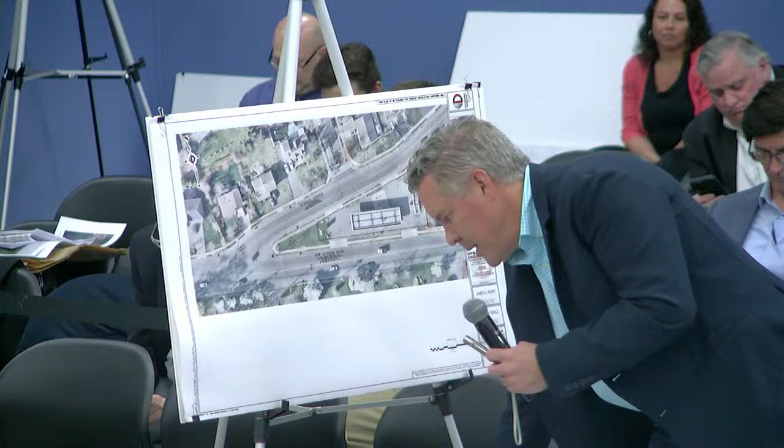All right, so before we talk about the result of the improvements, why don't you describe what the improvements are, kind of expand off of what Jim testified to, and why you think they better the area from a traffic perspective.

So before I do, I'm sure everyone's familiar with it. Here's the existing intersection, you could see... The Durham Avenue approach comes in at a significant acute angle, maybe 30 to 35 degrees. We love to have intersections at 90 degrees, it provides for the best and safest geometry. This intersection's been here a long time, that's how it's operated for all these years.

When we started working on this job, one of the first things we looked at, and we started conversations with the county as well as the township engineer, what can we do here to try to accomplish 2 things. One is help the operation of the intersection, get people through the intersection a little quicker, and as well, maybe more importantly, the safety at the intersection, how we can bring down crashes at the intersection. So what we came up with...

And Nick, just again to describe it, the angle of the intersection, what safety issues does that present? Yeah, so the main safety issue is your sight line. So when you come to an intersection at a significant angle, if I'm at an angle to the dais now, if I want to see the dais, I have to look well over my shoulder to see what's going on. If I'm 90 degrees to the intersection, I only have to look 90 degrees, where otherwise I have to look over my shoulder.

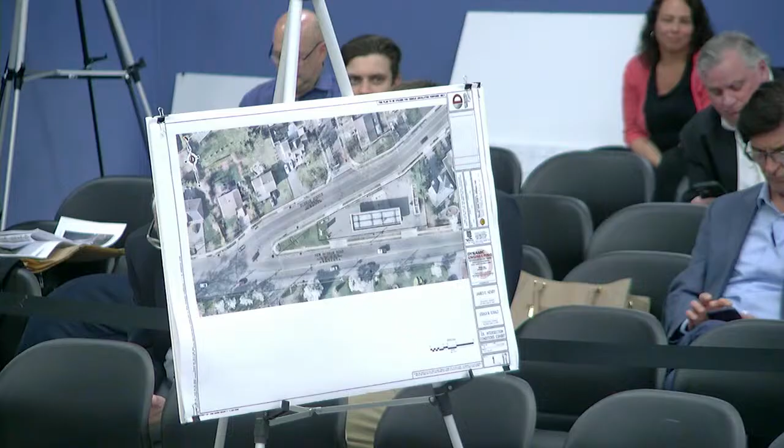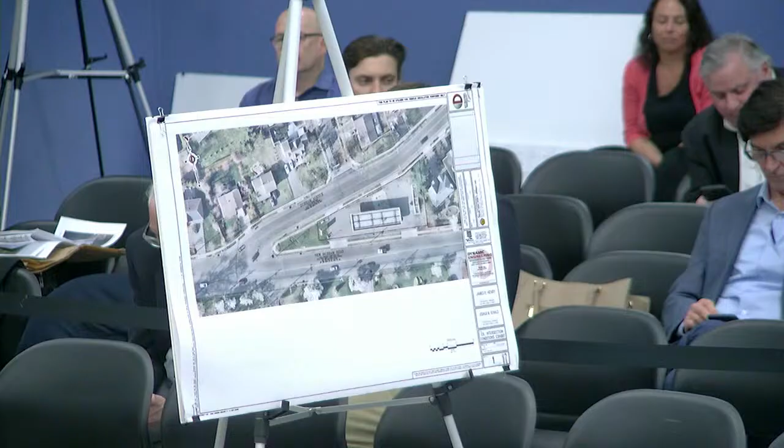So if you're exiting Durham Avenue and you look back to the left on New Durham Road, you have to look well over your shoulder. Also, while contending with this, and you can't see it on the exhibit, the roadway curves back up to the north, so there's some limited sight line in that direction. So now you're confronted with issues in both directions at the intersection. We can't fix the curve in the road, but we're trying to improve the angle of the intersection as well as moving the vehicle further from the curve of the road.

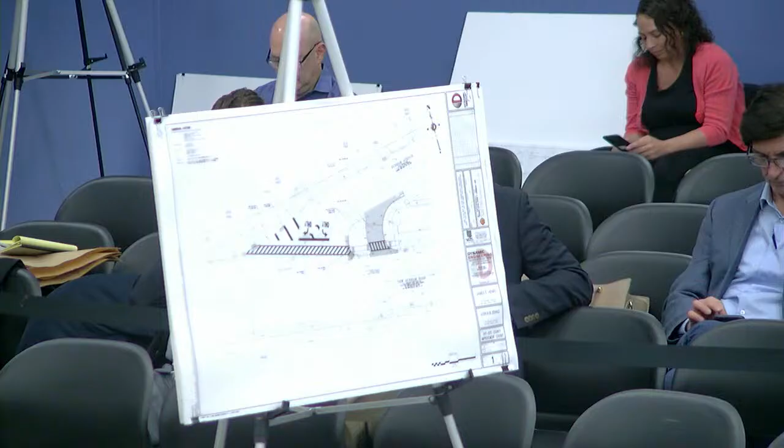Can you speak again to the pedestrian improvements there? Currently there's one ramp, but no receiving ramp on the other side and no crosswalk, so any pedestrian has to almost traverse blind across the intersection. Now we have a nice striped area, and if you're wheelchair bound, we have safe ADA accessibility across the intersection as well. So the ramps have been designed in conjunction with county standards for ADA improvements. Yes.

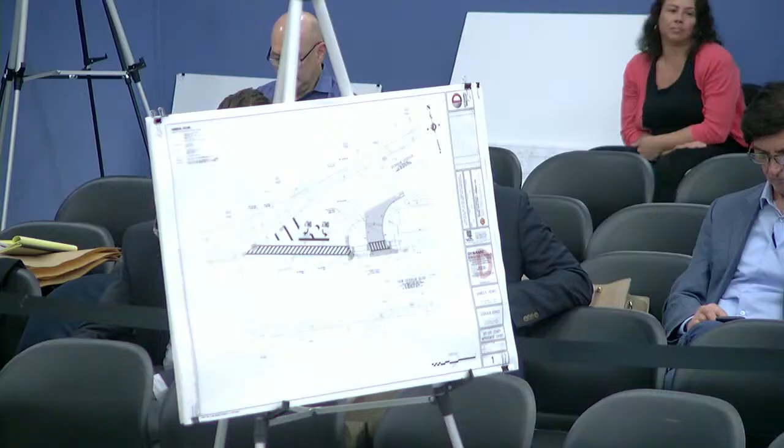So overall, from a traffic perspective, both on site and off site, you believe the project provides significant benefits to the surrounding area? Absolutely. Okay, Mr. Chairman, that's all I have for Mr. Verderisi.

Does the board have any questions for Mr. Verderisi? Mr. Chair, I have a question. So we have a left lane and a right lane from Durham Avenue, and if I were to go to New Durham Road, I'd be on the left lane, correct?

Ask that again? Sure. So you're splitting up the traffic, right? People who want to make a right turn towards 287 stay on the right. If you want to go left towards Metuchen, you take New Durham Road, staying to the left, center lane. Correct.

Now, I've seen a lot of people in this area, they like to inch up. So since we're diverting the traffic, the person trying to take a left turn - what if they keep inching up? And then I'm coming from New Durham Road trying to make a left turn onto Durham Avenue. That's an issue, right? Because I've seen that a lot of times.

We looked at the turning templates. Even if the vehicle was pushed up into the crosswalk, you could still make the left turn.

Actually, I didn't even bring it up, and thank you for bringing it up. The angle of the intersection also is creating a situation where people turning from New Durham going east onto Durham Avenue travel at a high rate of speed because of that angle. We've now taken the angle out, so they have to traverse it in a normal manner, where you typically make a left turn at about 15 miles per hour, versus now where they're traveling 40 miles per hour plus because the angle makes the turn so easy.

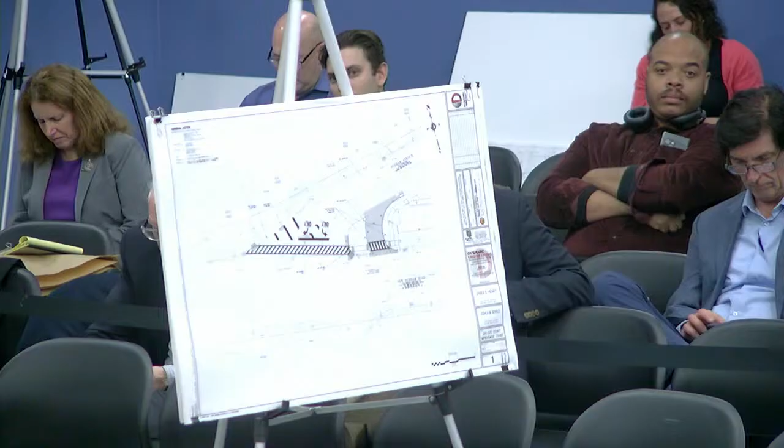More congestion on Durham Ave? No, why don't we go through that again, because if I didn't make that point well, I'll try again this time. Right now, if you go to that intersection at the busiest time, how long do you wait? In the morning, 6 minutes. It's in the traffic report, you can see it - 358 seconds, correct? Yes, which is 6 minutes.

If we make the improvements we're proposing - because I understand your concern, you're asking if people will wait longer - actually, with these improvements, people wait 4.5 minutes. So it's about a minute and a half improvement, a 30% plus improvement in operation. There still would be a stop sign though - always will be, yes. But you said not a significant delay - it'll improve because we've separated the lefts and the rights. You would wait much less time than you would today.

So the concern you have, we're actually improving it and making it better. Improving, yes, okay, all right.

This is probably for Jason. So right now, if you're traveling west on New Durham Road, and as proposed, there's that little curve to turn into Durham Avenue. That's on the applicant's property, correct? No, there's a big section of right-of-way there. Okay, so it's in the right-of-way. Okay, that was my question.

Yeah, so the county has approved us making those improvements at our expense. Right, in their right of way to make this improvement. Okay, and that part of that triangle is still the right of way that goes west of that turn, correct?

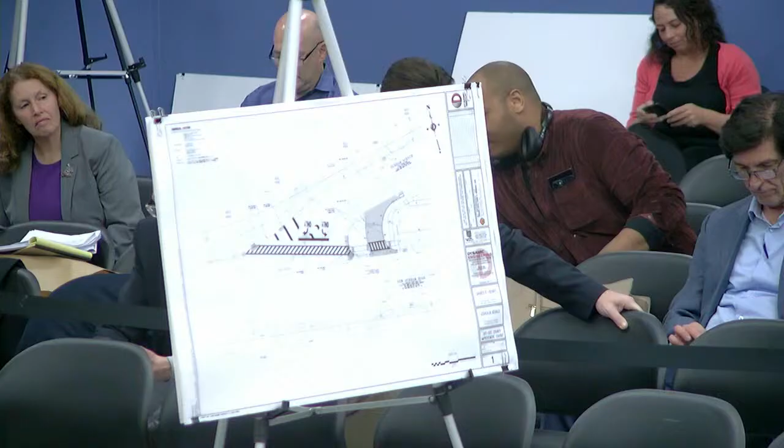Okay, and in your opinion, the proposed driveways are as far away from that intersection as you can possibly get them? Yes. And your cuts with the roads do conform to standards, both Middlesex County and Township of Edison? Yes, in my testimony I talked about how we were able to get everything actually west of Yolanda Drive. Okay, and Yolanda Drive, I apologize.

Now, the issue with noise generation on the mechanical devices - not your HVAC, but the mechanical devices currently shown on the eastern part of the property - they're in what had been the bank parking. The bank parking does give the board additional consideration, I think, a deeper consideration, because that's adjacent to the house. Is there a way you think the parking works without the bank parking?

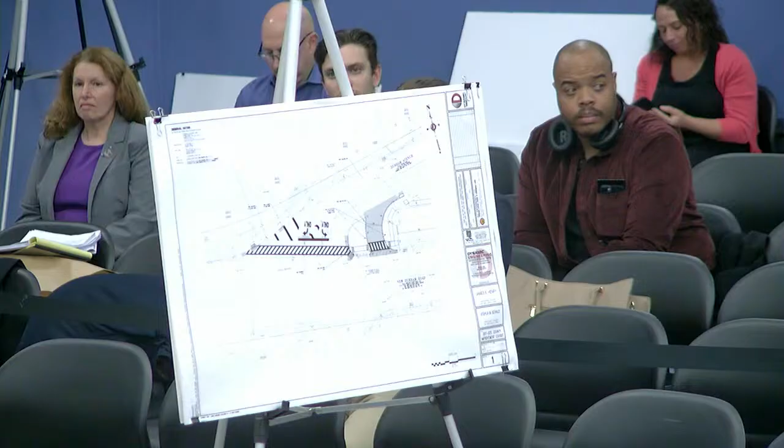I'd still like to see a couple of those parking spaces if they were needed by the employees. I'd be comfortable that the 5 along the front and the parking under the canopy is going to handle the customers for the store. Yeah, but I guess we could do, like the planner mentioned before, a land bank. That could be something the board could consider that could potentially increase the buffer in that area.

Yeah, to the point made earlier about the east side of the property, if the board felt we shouldn't build a couple of those spaces and put more landscaping, we could do that. And if they felt in the future we needed them, you could always have it ready to build if necessary. Yeah, that's a discussion you'll want to have with the board, particularly Mr. Ayotte, because he'd be the enforcing agent subsequent to a resolution.

And that's about it relative to on-site circulation, Mr. Chairman. It's very straightforward. Everything goes in a circular manner, everything's aligned to the building, parallel and perpendicular. I believe Dynamic has done what Mr. Verderisi says he's done. They've gotten those driveways as far away from that key intersection as they can, and they've committed to an investment in the intersection.

I was taking a bio break, Mr. Verderisi, when Mr. Tuvell was talking about the process with the county. I'm sure you did a warrant analysis with the county relative to a signal. Is that correct? Yeah, I talked about that a little when you weren't here. Yeah, okay. We wouldn't meet a warrant because of the small volume of left turns out of the side street.

And what a warrant analysis is, and I'll rely on you to correct me when I'm wrong - a warrant analysis is what warrants a traffic signal, whether there's fatalities at an intersection, relative to volumes of flow in the intersection, the various legs of the intersection. And I believe there's 5 or 6, Mr. Verderisi? If you add in, there's more because there's A's and B's to some. So yeah, there's more than that. This doesn't meet any of those criteria?